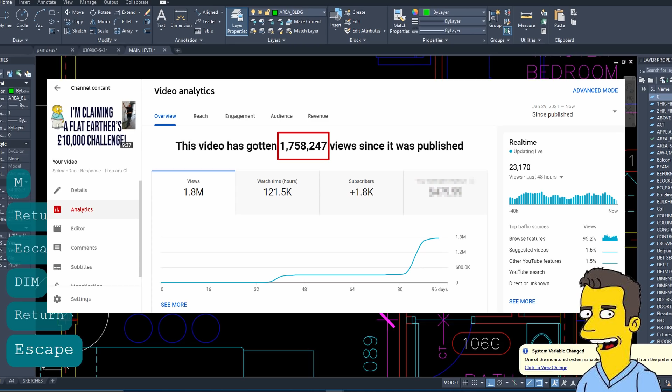Thanks, guys. I got some really interesting comments on the last video, along with over 1.7 million views. I can only guess that the YouTube algorithm suffered a massive technical problem, and people searching for Wiz Khalifa were accidentally redirected to my channel because of the reference to the Burj Khalifa in my previous video. Anyway, a lot of the comments were asking for clarification and additional detail, so here we are.

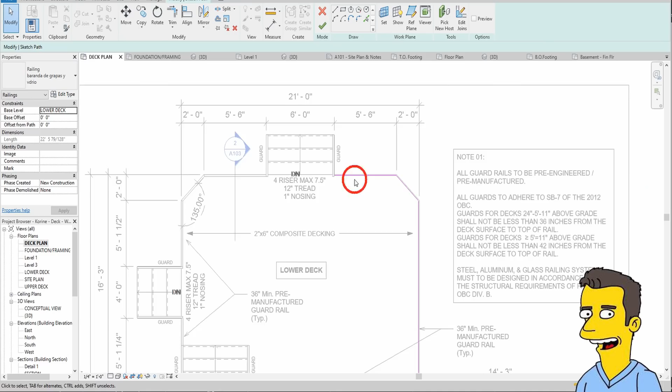Now that all that stuff is out of the way, it's time to get into the new video. Let's go. Of course I didn't win. At least I haven't heard a peep from Calvin anyway. He might have fallen off the edge of his flat earth, plus the comments on his video have been disabled.

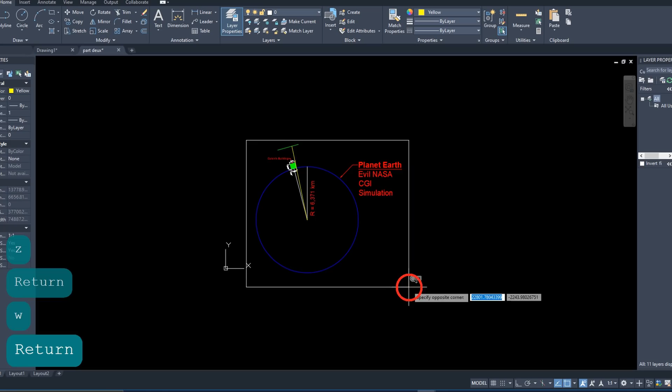By the way, judging from some of the comments from flat earthers on my previous video, everything I'm about to show you is completely invalid because I'm using computer software that's been designed by globe earth biased programmers from Autodesk in collaboration with evil NASA to deceive humanity. In other words, it's CGI. I love you, Creaky Blinder. Keep up the good work, mate.

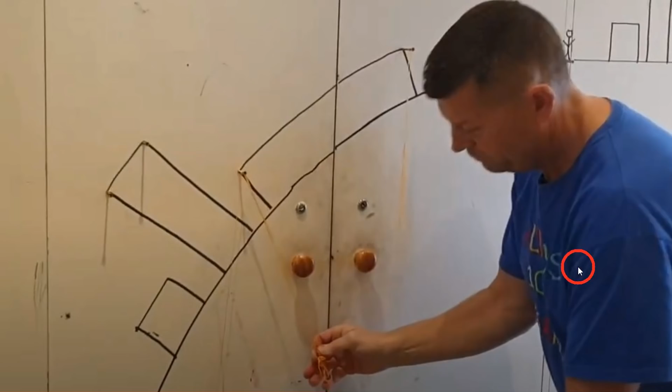So let's take a look at why scale matters and why some flat earthers can't seem to wrap their heads around this. I'd say Calvin's whiteboard globe has a radius of about 1 meter, and his smallest building is about, let's say, 10 centimeters. Scaled up to reality, in relation to the Earth, Calvin's smallest building would be a whopping 637.1 kilometers high. I've made adjustments to this building to show how the outside walls would be angled away from one another if a laser level or plumb line were used to line them up using gravity. The dimensions are also rounded off for simplicity.

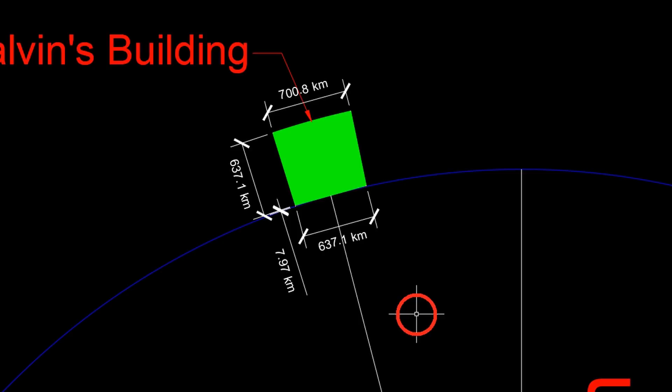We can see that the floor of Calvin's building is 637.1 kilometers wide. And interesting to note that the roof is larger at 700.8 kilometers. And the reason for this is because we used plumb lines taken from the center mass of the Earth all the way up to the outside walls to give us our angles, like we did in the previous video.

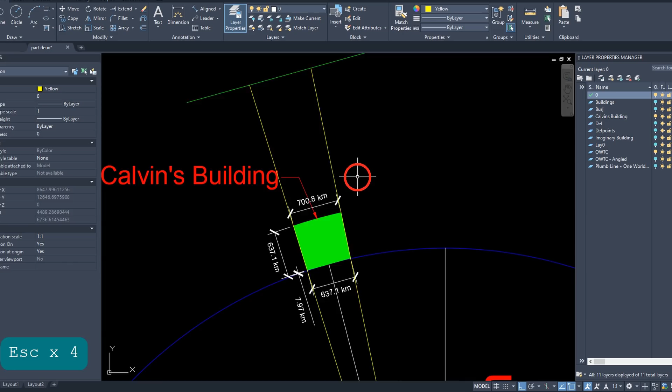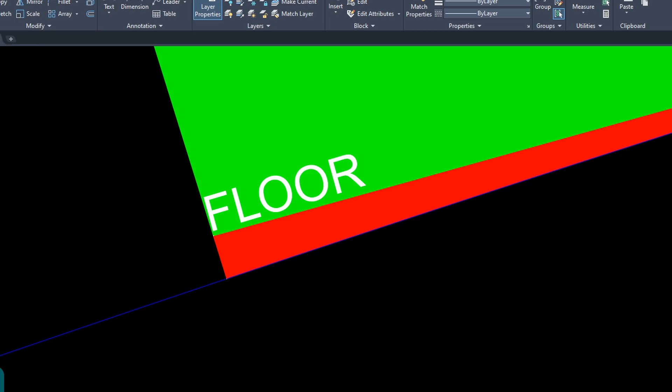I think one of Calvin's arguments is that we don't see buildings with curved roofs, floors, etc. that compensate for the Earth's curvature. I can see where he's going with this. For example, if Calvin's building were real and had a perfectly flat floor, it would be interesting to see how far the floor would be elevated from the Earth at its farthest distance. So we can see here that the distance between the Earth's base or curvature and the base of Calvin's flat floor of his building is 7.97 kilometers.

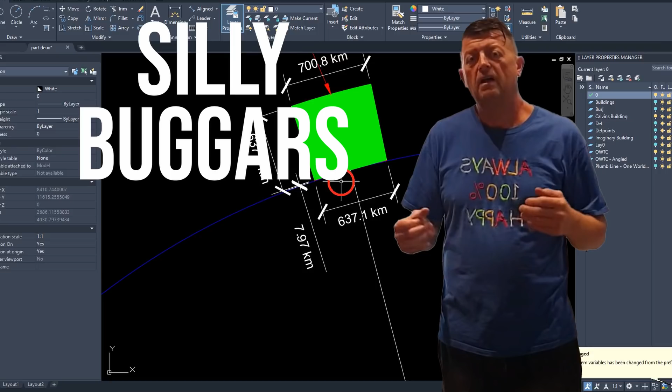Of course, this is completely unrealistic, but let's verify this number with an Earth curvature calculator. In order to do this, we need to know the distance from the point at which the building touches the Earth all the way to the farthest edge. So half of 637.1 kilometers is 318.55 kilometers. I'm using a simple calculator called Earth Curvature Calculator, available at omnicalculator.com. And let's just punch in those numbers. We said 318.55 kilometers. We can see that we get a distance of 7.9 kilometers. So the math works here, guys.

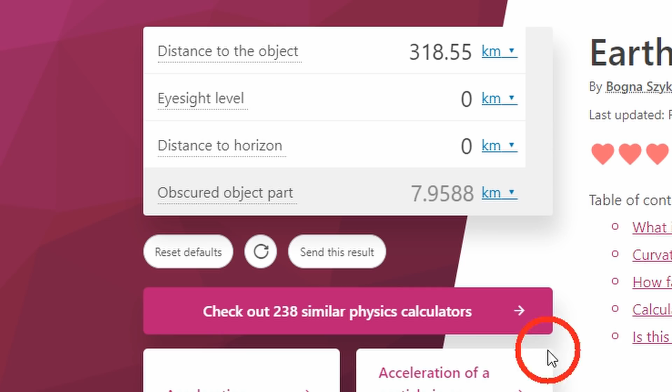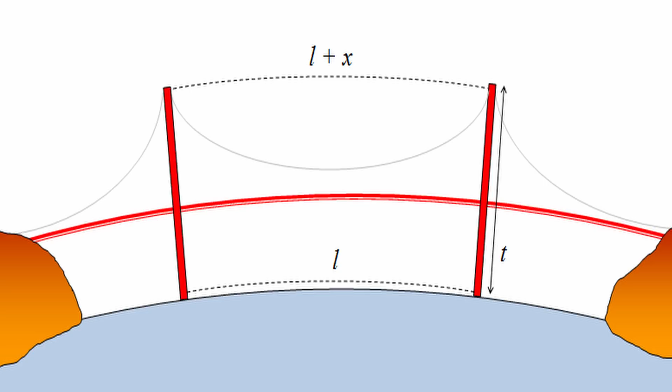In the real world, engineers have to compensate for Earth's curvature all the time when designing and building massive structures, like long span bridges and underground train systems. If these calculations aren't taken into consideration, we can end up with major problems. So this is why scale matters when you want to make an accurate representation of reality. Let's dive a little deeper and do some real-world experiments in AutoCAD to further prove that you can build buildings on a global Earth with laser levels and plumb bobs.

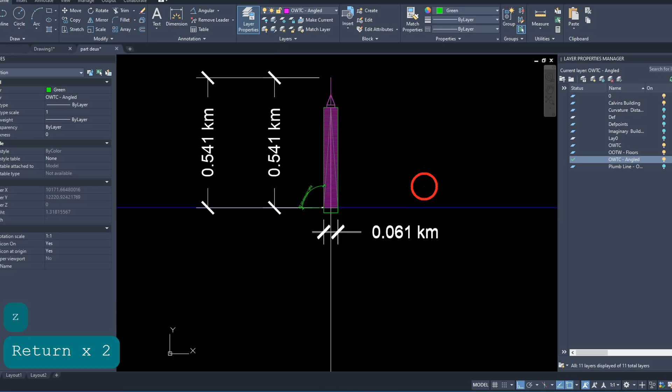In this example, I'll use a building that's a bit more realistic. Let's use the Freedom Tower in New York City. The tower is 541 meters high to the spire by 61 meters wide at its base. It has 94 floors. Here's Calvin. I'm guessing he's about 5'10", so this should be accurate enough for scale.

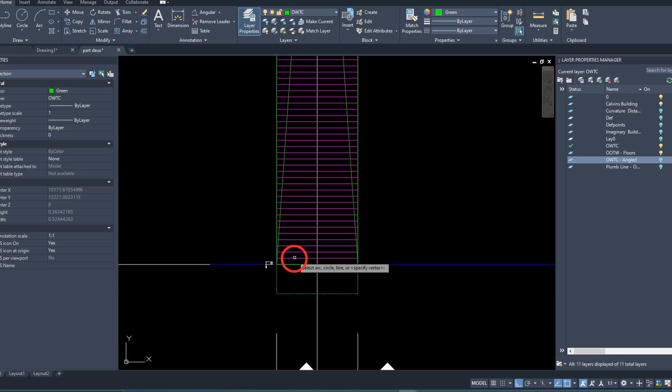I need to point out something pretty obvious here, and that's that using plumb bobs and laser levels would not be a practical way of achieving 90-degree parallel exterior walls on a building of this scale. In the real world, this would be achieved by laying dimensions from a reference point on each floor to the outside of the building. But what I'm going to show you is that it could be built this way, and we'd never know the difference.

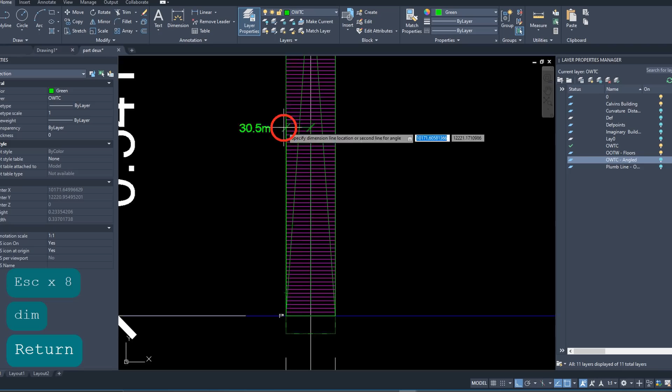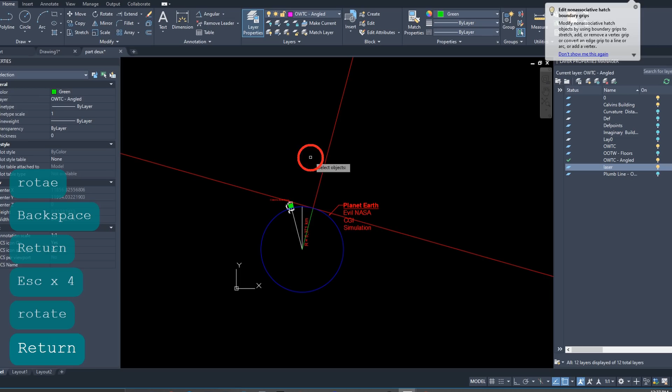Instead of a plumb bob, this time around we'll use a laser level. A laser level works on the same principle as a plumb bob, except in reverse. A beam of light shines out the top of the laser level, and the angle of the beam is determined by a weight at the bottom of the laser level, which points to the center mass of the Earth. It doesn't matter where you are on the planet, and this works in 3 dimensions. The weight at the bottom of the laser level will always point to the average center mass of the planet. In turn, the laser beam will point in the opposite direction.

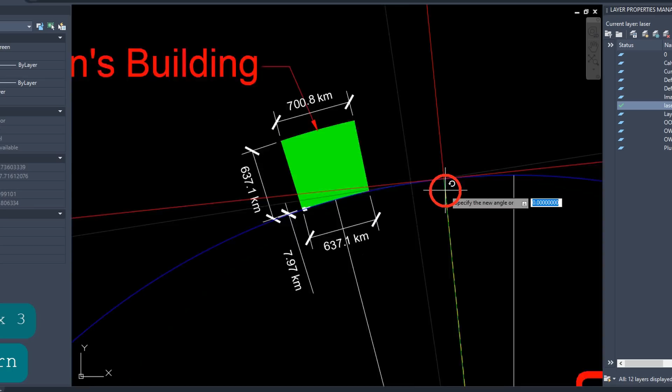Now let's place our laser level at the base of our tower. I'm going to select it and rotate it using the center of the Earth as a reference. And as I zoom out, you can see that the level beams extend to infinity beyond the edge of the globe. Now I'm going to mirror the laser level to create a duplicate on opposite sides of our tower. So now we have 2 of these placed at opposing ends of the base of our tower, and both are level using the Earth's center mass as a reference.

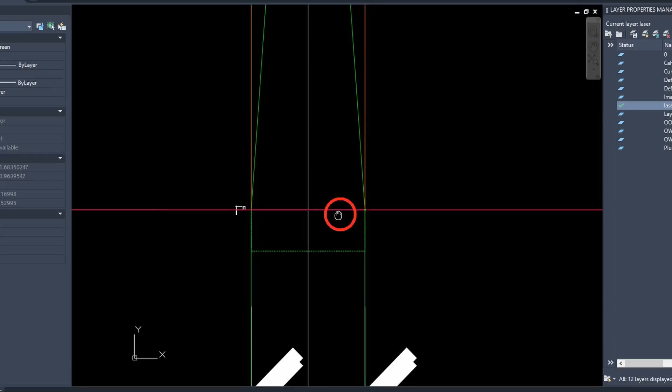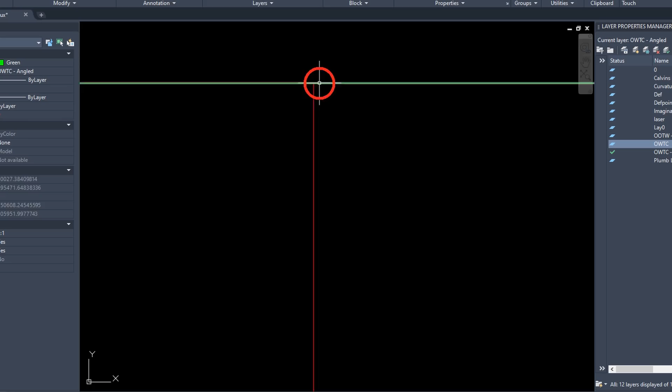Now that we have our laser levels placed, we can create our angular dimension to see exactly how much the 2 lines deviate. Tiny, infinitesimal, but real. To show you just how ridiculously small this angle is, I've drawn a green line exactly 1 million kilometers away from the base of our tower. Remember, the base of our tower is 61 meters wide, and at this distance, our laser level lines deviate by about 9.6 kilometers. Please tell me I'm not the only one that finds this kind of stuff cool.

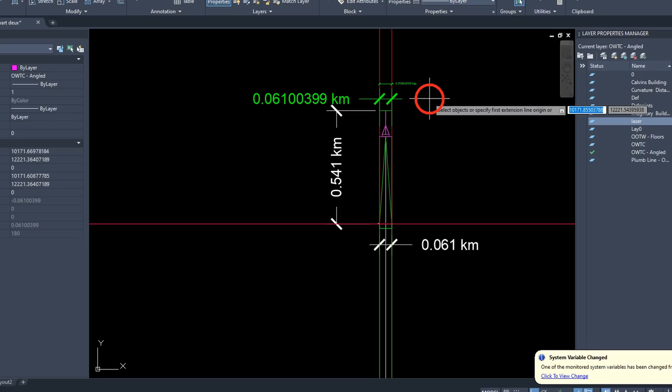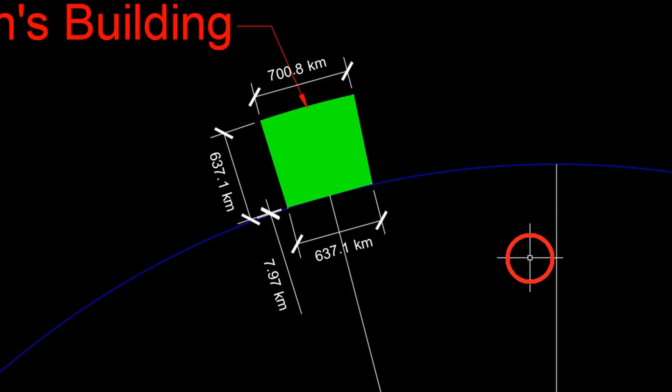Next, we can take a look at the difference in length between the floor and the roof. The floor at grade, as we know, is 61 meters wide, and our new roof is now 61 meters wide, plus a tiny little bit. When we do the conversion, this works out to a difference of 4 millimeters, roughly. Funny thing is, I'm betting that the actual deviation on a building of this scale is more like inches, because we can never build to these sorts of tolerances in the real world. But again, this just proves to Calvin why we'd never see a building with a roof wider than its base if it were built with a laser level or plumb bob.

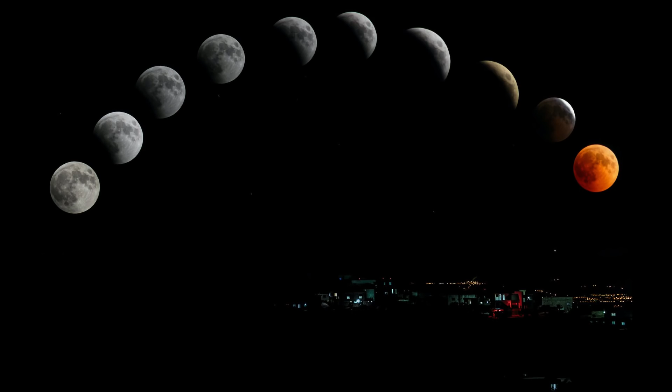I need to clarify that I am not trying to prove a global Earth here. That has been done countless times by people who are much more established on YouTube than me. It's also been proven countless times by anyone who's seen the moon in its various monthly lunar phases. What I was attempting to demonstrate in my previous video is that you can use plumb bobs, laser levels, levels of any kind for that matter, for the purposes of construction on a global Earth. You can indeed construct buildings on a globe with curvature.

Well, that pretty much sums it up, folks. I hope it clarified a few things.

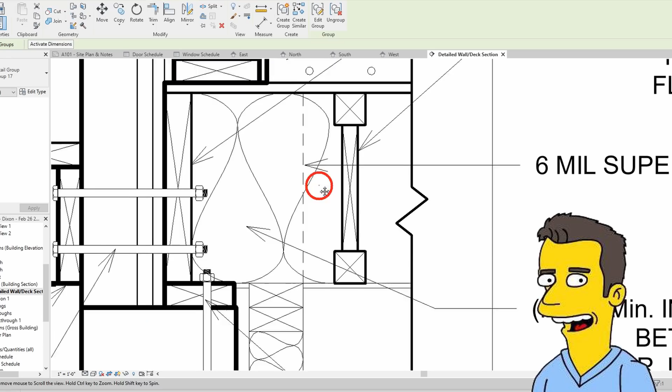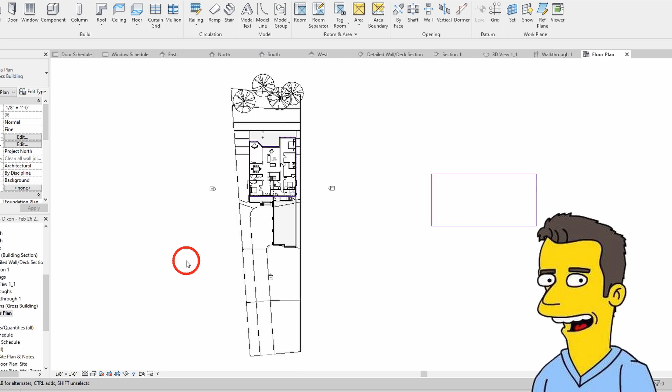And Calvin, if you're watching and this video in any way convinced you that we can use traditional tools such as laser levels and plumb bobs for construction on a global Earth, I really encourage you to donate that £10,000 to a charity of your choice. Seriously. You seem like a nice guy, and I certainly hope you don't take anything I've said here in this video personally. The jabs were only intended to keep things light for the video.